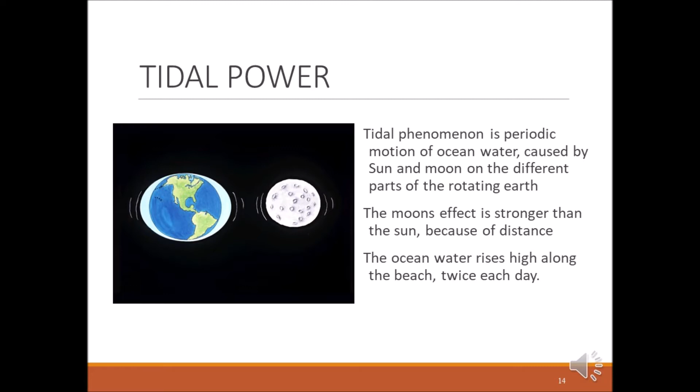And then the part of the ocean that is facing the Moon, the depth of the ocean rises slightly because of the gravitational pull of the Moon. Okay, so twice each day you have this tide along the beach when the sea level rises and drops.

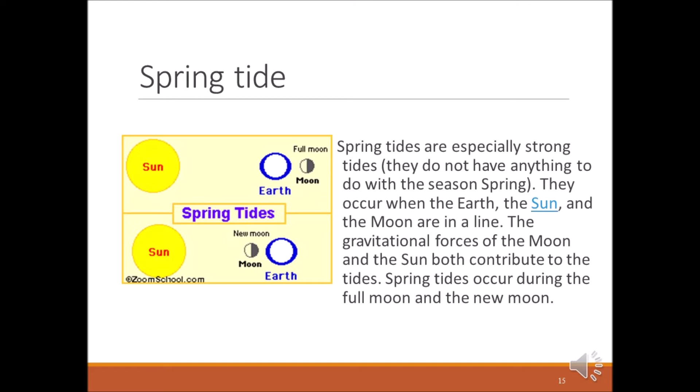There are two types of tides. One is what is called spring tide, or in Malay we call it air pasang besar. This happens when the sun, the earth, and the moon are in a straight line, and then they produce the strongest form of the ocean. Then when you have this, the level of sea rises quite high. Okay, it is called spring tide.

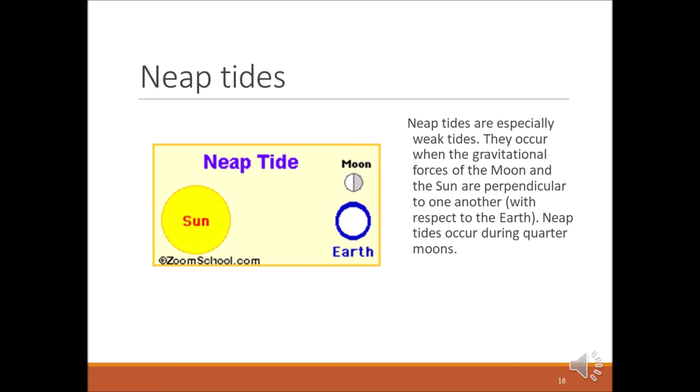Okay, the other form of tides is called neap tides, when the moon is located perpendicular to the earth compared to the line between the sun and the earth. So the tide is not as big as the spring tide, and these normally occur at quarter moons.

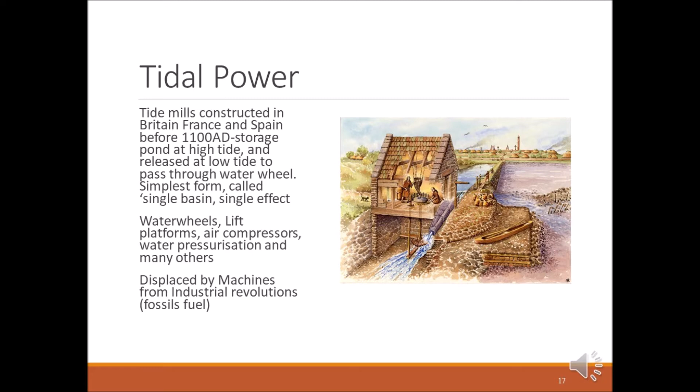The use of tidal power is actually not new. As early as 1100 AD, people have used tidal power to do various work. It is as simple as when the tide rises, they collect the water in a pond. So the water level in the pond is at a high level; when the sea level goes down, they would let go of this water in the pond, and this flow of water will create energy. You can use it for your mill and many other works that need to be done using the pure kinetic energy of the flowing water.

In modern times, tidal power is being used to produce electricity, and they use what we call tidal barrages. These are basically dams which let seawater in and out, and use the differences in the sea level to run a turbine that would generate electricity.

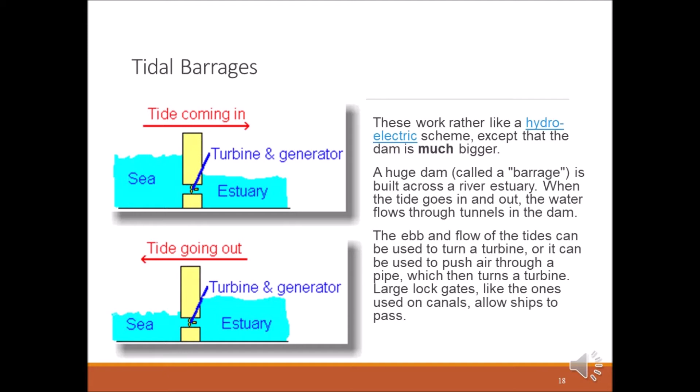Due to the potential of renewable energy from tidal power, there was a proposal in the UK in the 1980s to do a series of barrages across the Severn estuary waterways, between England and Wales. They proposed that the system of barrages would produce over 8,000 megawatts of power, and would provide 7% of the energy needs for England and Wales.

However, there was a big debate, and they did a series of studies, both pros and cons of adopting the project. This is part of the task 8 that I gave to you earlier, to see either side of the debate. So eventually in 2011, the idea was rejected and nothing was done regarding this. But in other countries, in France, they had proceeded with such ideas, and some have achieved a certain degree of success.

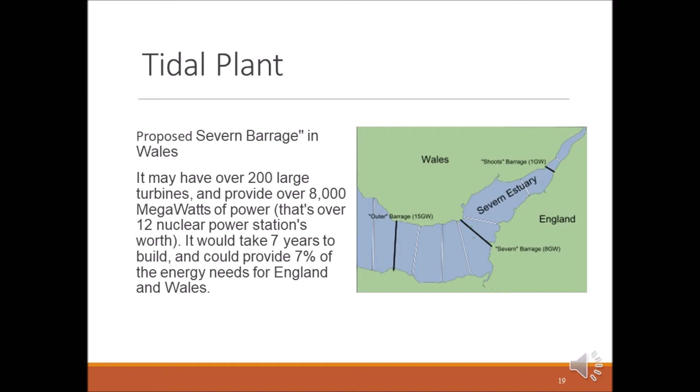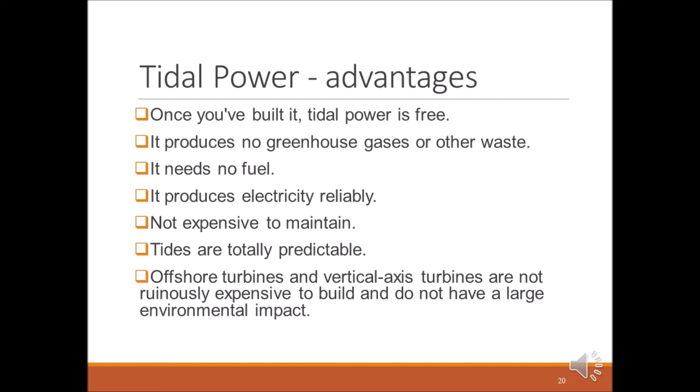As with many other forms of energy generation, there are some disadvantages. Overall, even though we said earlier it is not that expensive compared to other technology, it still is expensive compared to the regular fossil fuel power plant. And the ecological impact of the tidal barrage is of concern. Okay, many birds rely on the tide and mud flats when the tide is low, so ecological damage might be possible. And also there are migratory fish that need free travel up and down the stream.

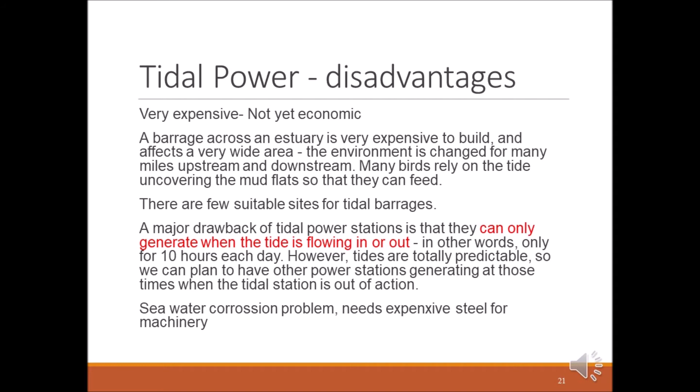Okay, but the major drawback is it can only generate when the tide is flowing in or out. In other words, about 10 hours each day. When the level inside the barrage and outside the barrage is equal, there's no power generated. So we can plan to have other power stations generating at those times when the tidal station is out of action. And the problem with seawater is corrosion, which would require expensive mechanical systems or machinery for the barrages. So these are some of the disadvantages.

Another form of energy from the ocean is wave energy. If you trace the source, it's still solar energy, where the sun creates high and low pressure regions, creating wind that blows above the surface of the sea and creates waves. Even though the wave might change, the kinetic energy resulting in the waves remains on the surface long after the wind dies down. Compared to other forms of renewable energy, it is most concentrated and consistent, with wave round the clock throughout the day.

One of the main characteristics of wave energy is that the higher the wave, the more energy you are able to extract from it.

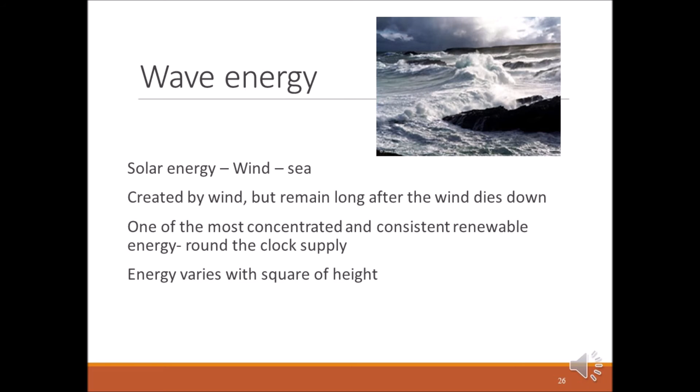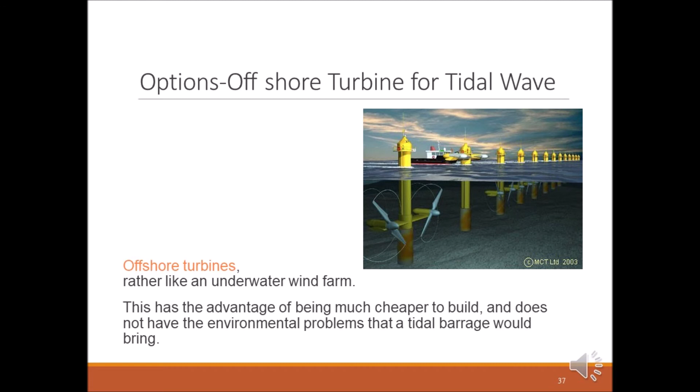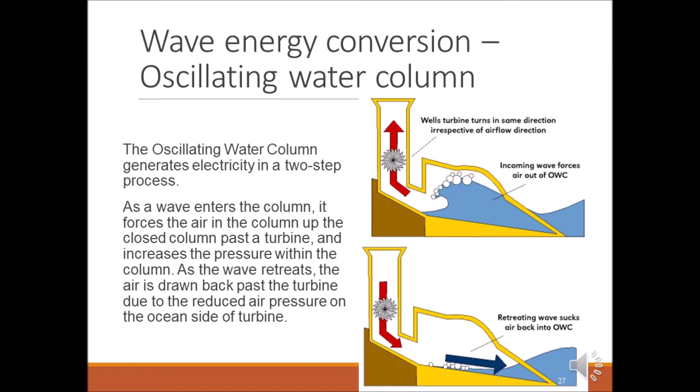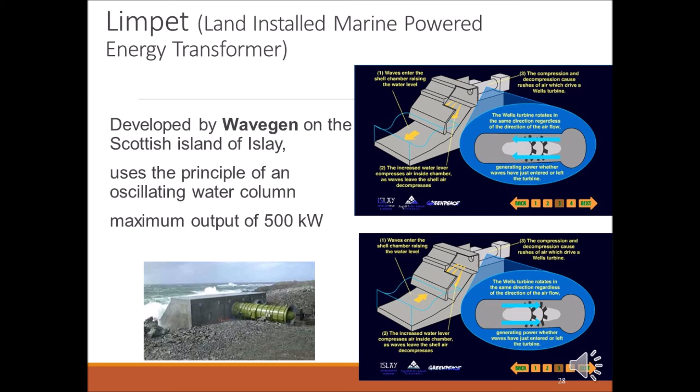These are some simple examples. This one is called LIMPET, Land Installed Marine Powered Energy Transformer. It uses the principle of the water column—a simple mechanical principle using the movement of the wave that pushes air through the turbine.

Then we have the Salter's duck. The bobbing of the duck, or the floating part of the mechanism, creates rotation along its axis and creates kinetic energy that runs a turbine to produce energy. However, this is not the most popular one because of technical efficiency.

A simpler example is what is called a tapered channel. When the wave rushes to the beach or shore, with this tapered channel, the water is pushed, climbing up to a higher level into a higher tank, and then there is a pipe that lets this water run back down to sea level, and this creates energy that is turned into electricity. This is quite low maintenance and has great flexibility.

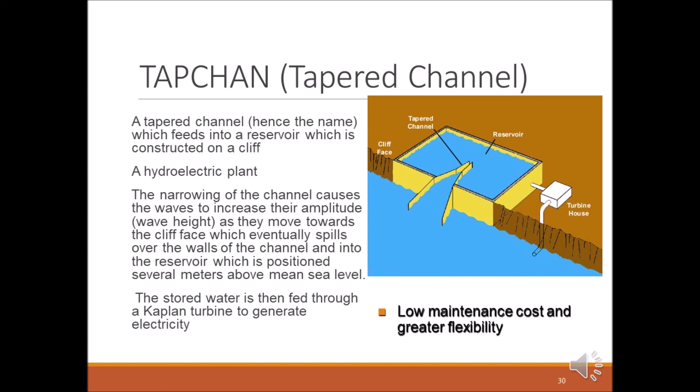There are many other technologies to tap energy from the wave, such as the wave dragon. If you're interested, you can Google it, and I think development of the technology is fast these days—they have better and more efficient forms of this. You have Pelamis, which looks like dragons that float across the wave, developed many years ago, but we haven't seen this in real capacity these days, maybe because of some technological issues.

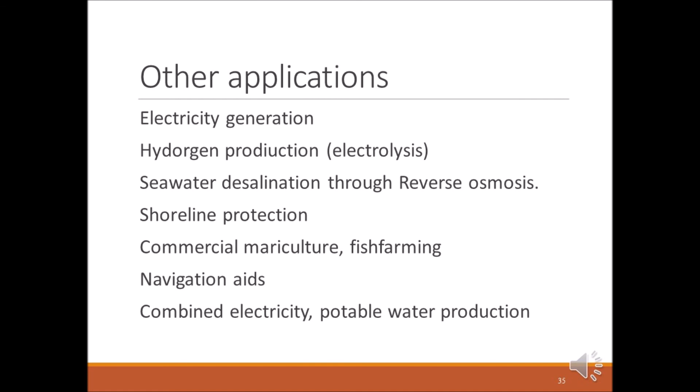Apart from electricity generation, it can be used to produce hydrogen, desalination to get clean water from the sea, protect shores, help create mariculture fish farming enterprises. It can be part of navigation aids, part of a lighthouse. As with OTEC, it can produce electricity as well as generate potable or drinkable water.